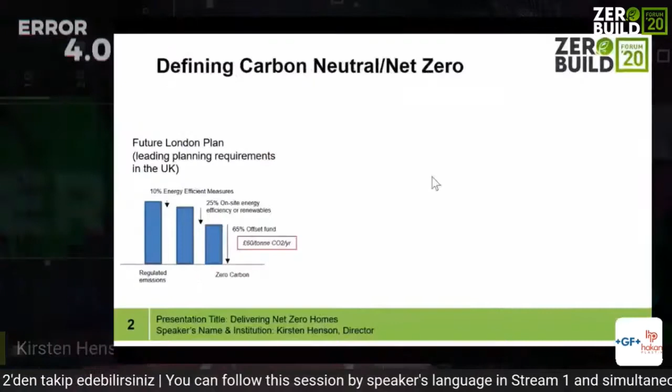I think the first thing to talk about really is how we define carbon neutral or net zero. In the UK, London is seen as the city that is pioneering the direction of net zero carbon. But in the future London plan that's coming out, we talk only about regulated emissions, and those are the emissions controlled through planning policy in the UK, something we call Part L. That only deals with space heating, water heating, lighting and cooling. You'll see that there's a problem with that in terms of moving towards true net zero.

The second problem with the way that we talk about or define carbon neutral in conventional planning policy in the UK is that, beyond only talking about regulated emissions, the planning policy requires us to deliver a 10% reduction through energy efficient measures, then a 25% additional reduction through on-site renewable energy generation, and we can simply pay £60 per tonne of CO2 per year for a 30-year period to offset the residual regulated emissions.

So there are real issues with this. If we have a look at the next graph here, you'll see the regulated emissions — this is what some people are calling carbon neutral, even with this offset: heating, lighting, cooling and hot water. Some people are starting to talk about net zero being full operational emissions, so this is in the UK what we call unregulated emissions, the red bar here.

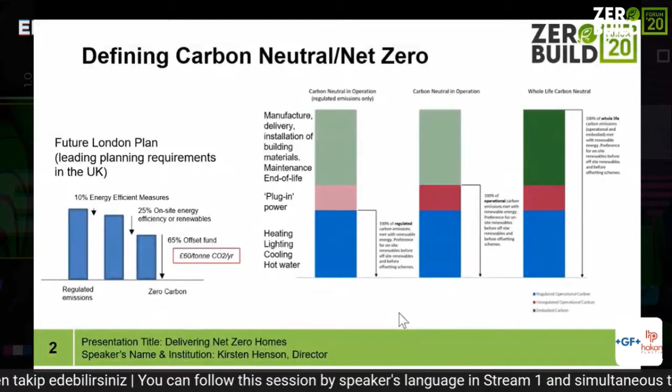Interestingly, he already had a design. The designers were at early stage 3—that's sort of a concept design in the design stages that we use in the UK. So we were already working with something. Our first port of call was to have this conversation with Ben, and explore what we need to do around defining carbon neutral.

Some people get distracted by renewable energy technology, but what we fundamentally must do is reduce. It's the first step—we've got to reduce our energy consumption in the first place. There's no way we can install sufficient renewable energy capacity if we don't significantly reduce our consumption first. In order to then look at generating sufficient renewable energy on site to meet the demands, we need to be looking at all-electric buildings.

We need to be moving away from gas. We generally use gas for heating hot water in the UK, and we need to move away from that. At the moment, we tend to rely on the electricity grid—we export our excess renewable energy to the grid, and we import, for example at night, if we have PV panels, we need to import energy from the grid.

This is only going to work for a certain amount of time before we really start having to look at renewable energy storage—whether that's hot water storage, battery storage, or localized storage. Otherwise, the energy grid is simply going to fall over with these peaks and troughs.

But at the moment, we look at zero carbon on a net annual basis. We generate sufficient energy within our building footprint to meet our building demands, but over an annual, not daily, life cycle.

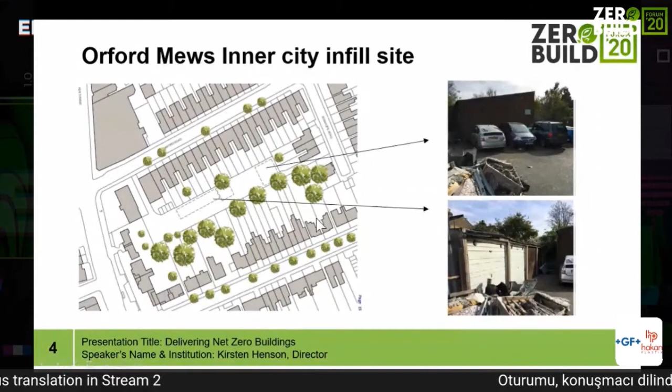What you'll see here is surrounding houses—these are the sort of Victorian terraces. People love them because they've got these big back gardens that you see here. But at the end, you tend to get these rather rundown garages that are underutilised. You can see this was the site we were looking at, an infill behind the properties, well spaced from them, with access just alongside as well.

So the initial design—the architects had already started work. We had the imagery you can see here. It's quite complex, single story, part two story. You can see there's a lot of movement in the facade in terms of setbacks and corners. We have some very complex junctions here, including a glazing-to-glazing junction.

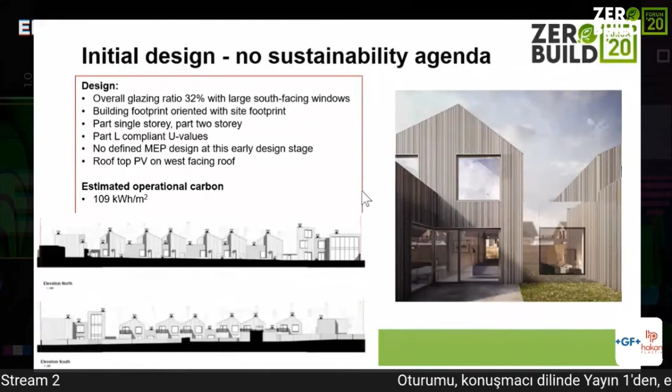We were looking at glazing ratios of 32% with large south-facing windows, and Part L compliant U values—that's where regulations will take us, the regulated emissions that tell us what U values building fabrics must achieve. At this early design stage, there was no mechanical and electrical yet, and there were rooftop PVs on the west-facing roof.

When we did the analysis, we found that the estimated operational carbon was about 109 kilowatt hours per metre squared.

Having a look at the embodied carbon, it was quite traditional - we traditionally build homes out of brick, but with a concrete strip foundation. The architects tend to like open plan living spaces, and that led us to a lightweight steel frame within the building, PUR insulation materials, and aluminium roofs. The homes had timber facades, but the workspace had an aluminium facade proposed. The estimated embodied carbon, when we calculated it, was almost 1,000 kilograms of CO2 per metre squared - so really quite significant.

Once we got involved with a great design team, the engineers and architects really embraced this idea of carbon neutral and engaged with us in looking at what they could do to reduce the operational carbon. We started discussions around building fabric, doing analysis of how you could improve it and what difference that would make, the impact of different mechanical services, the air tightness, build quality, and the design details of the building form factor itself.

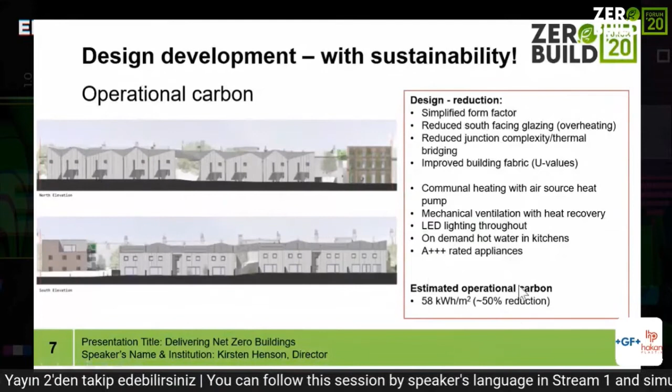So that has delivered almost a 50% reduction in the operational carbon, bringing us down to 58 kilowatt hours per metre squared. The other great thing, of course, is we looked at PV panels on the roof.

What you'll see here is a really nice design quirk, in that we've simplified the building form, but the architects have then twisted the roof to allow maximum south-facing roof - the optimum orientation and optimum angle for the PV panels to maximize their output, which also adds design interest.

And you'll see the building at the end - this is the office space, so you're seeing the PV panels there on the roof as well, with some small green roofs and terraces cropping in on the roof spaces. That has brought us right down to just 15 kilowatt hours per metre squared.

So we're not quite zero carbon yet - we've got some more considerations to look through. We're looking at smart technical solutions, on-site monitoring, having a look at how we can create an app that residents use to monitor and evaluate their own energy consumption, and owner engagement. It's not just a case of selling these buildings and walking away.

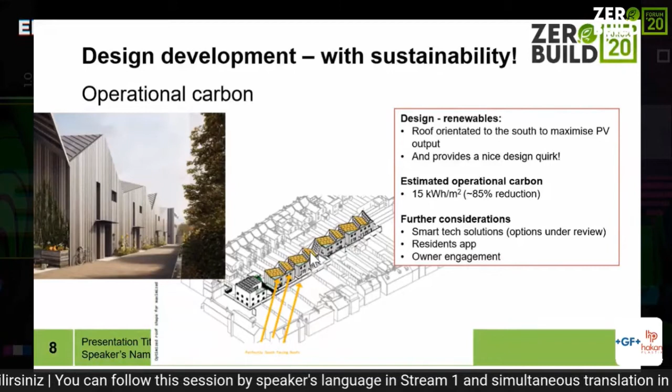We do need to engage the residents in how they're using their buildings, and see whether through that engagement with smart tech, we can get this down to a net zero carbon operational residence.

If we look at the embodied carbon, we did an analysis. For those not familiar, this refers to European standards: Module A, B and C. Module A is about the extraction and manufacture of the building product. Module B is any replacement - for example, a building may last 60 years, but you'll likely have to replace mechanical systems maybe in 20 years, and windows perhaps every 20 years. So that looks at replacements. Module C is what happens at end of life, so the disposal impact.

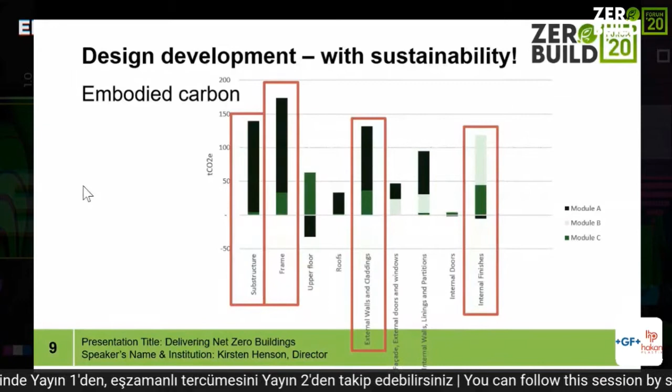So we started here - this is the analysis we did to engage with the engineers and architects to look at some design solutions. The engineers suggested that if we reduced the 8-metre internal span in the living areas to 4 metres, that would allow us to have a locally sourced softwood timber frame.

With the existing garages, the engineers realised we can reclaim some bricks. We can perhaps use that for commercial space cladding, but we can also use those reclaimed bricks in foundations - moving away from a lot of concrete in the foundations by actually using salvaged bricks from site.

You'll see we've started exploring innovative materials. This was actually done on site - some of my team with experts building true rammed earth walls. There is no cement in these walls. People often talk about rammed earth, but they put so much cement in them that they really can't be considered rammed earth. This is literally nothing but the earth we have on site.

You can see there's sufficient clay in there that we're producing a really quite beautiful architectural internal wall, which means no finishes are required. The finished building provides thermal mass within your residence as well.

We've moved away from those traditional building materials. The aluminium facade on the office building is replaced with brick, locally produced in the UK, with much lower embodied carbon. You can also see planting going on around outside. We've moved away from plastic PUR insulation to sheep's wool insulation, and instead of plasterboard we're looking at wood fibre boards and clay plasters - really natural finishes, natural materials.

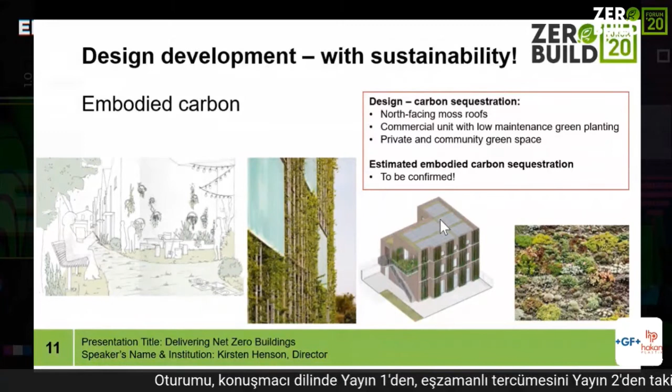And just a note on the broader idea of sustainability. It's not just an office space, we've decided. Actually, we need a community well-being space so kids can get together and have a birthday party. You can invite your neighbours round to do some yoga together, or have a dinner party. So providing that flexibility, providing that space.

And I think as we've been suffering with COVID and the lockdowns, we all know the COVID crisis has caused a mental health crisis. I think these protective spaces within our community are going to be really important as we face more and more of these challenges, whereby people can still protect themselves but don't have to completely lock themselves off from social contact, because that's really quite damaging.

We're going to have a reuse station. So the idea is not everybody needs to buy a ladder or a hammer or a drill if they want to put up a shelf. They can simply go to the community reuse station and borrow those materials.

So we're moving towards this idea of a sharing economy, a sharing room, composting facilities provided on site so that people can use that community area for growing vegetables, providing a bit of resilience, if you like, in terms of community food provision as well.

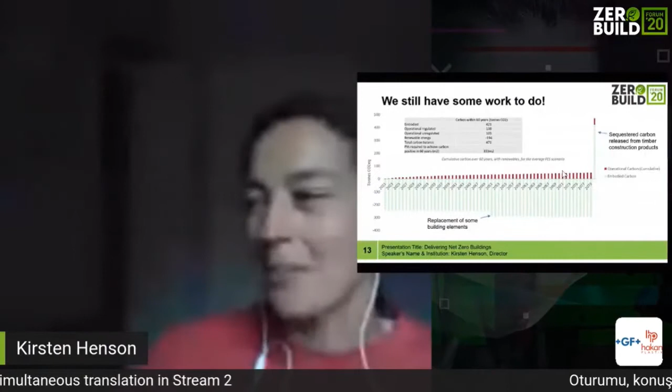So we do still have some work to do. This shows you the red bar is the operational carbon, the cumulative. You can see that very small increase as we go. The grid in the UK, as with many electricity grids across the globe, is decarbonising, so we have taken that into account. But even with all of these initiatives and ideas, we still have a little way to go to deliver true zero carbon.

What you can see here is the negative embodied carbon of construction, and that's because of all those natural materials we're using. The clay has very low embodied carbon, but the timber and straw sequester carbon during their growth period, so they become negative. There is something very strange with carbon footprinting.

The methodologies we use in the UK say that all of that carbon we've sequestered in those natural building materials has to be released into the atmosphere at the end of life. So even if we reuse those building materials rather than burn them, for example the timber, we still have to release that embodied carbon once we reuse it.

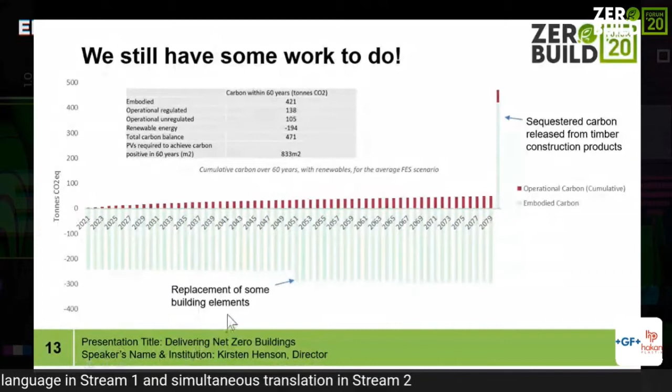My feeling is that we face a carbon crisis now. So let's take advantage of natural building materials that absorb carbon in their growth, rather than using concrete and steel that release carbon when manufactured, and we can continue as we move towards this low carbon economy. The fact that we may burn the timber for biomass afterwards, I think we're moving that down the line - it's not that we're shifting the problem, but we face a carbon crisis now. So let's move towards low embodied carbon materials.

So in terms of repeating success, I think there's a few key things we need. There's a strong client vision. You need to ensure there's a clear definition of net zero carbon that's understood by the whole design team before you start. There's a willingness within the design team to include sustainability as a key design driver. We often look at cost, program, and architectural wow as design drivers, but sustainability has to be a key design driver in order to progress towards zero carbon, and designers have to think within those sustainability parameters.

Collaborative design, where everybody is open to ideas. No idea is shut down before it's explored properly from a cost, program, architectural, engineering perspective. It's an iterative process - we can't get this right the first time. So there is time required for thought, time required for analysis, to go back and do the technical analysis and see how far we've got.

Exploring innovation with the supply chain is a really important part of delivering zero carbon buildings. And of course, trialing new products as well - we can't be afraid to try some of those new products.

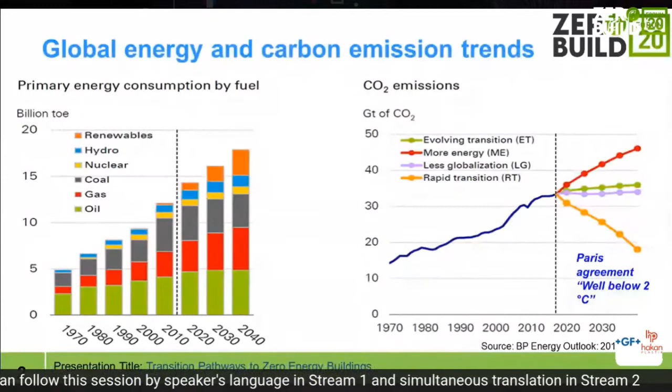Now, as we use more energy, we are also trying to achieve less carbon, and this doesn't go so well. If we want to achieve the target of the Paris Agreement, then we have to immediately start reducing our carbon dioxide emission. And by the middle of the century, we have to about halve that or reduce it by about 50%.

Now, for us to reduce energy use in our society, we have to understand where we use the energy and the dynamics in these sectors. And if we look at our sectors, we can see that the building sector is one of the sectors which uses the largest share of the energy, apart from the industrial sector.

Today, 1/3 of all our energy is used in the building sector. We can see that the annual growth of energy in our sectors has reduced slightly because we are pursuing more energy efficiency measures. But still, the energy used in the building sector is significant.

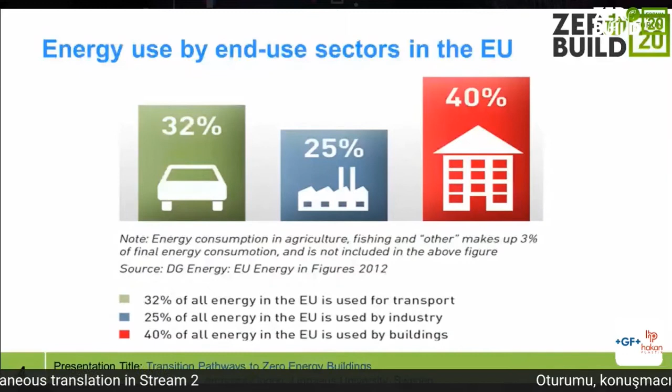This is a global picture. We can also see the same picture from the European perspective, where we see that the building sector accounts for most of the energy use. So we have a lot of potential in the building sector because this is a sector we use a lot of energy, both globally and in the European Union.

So this gives us motivation to pursue efforts to reduce energy use in the built environment, or our building sector. There are many measures we can implement in the building sector. Today, what the European Union is advocating for more and more is transition to nearly zero energy buildings - that is, buildings with low energy use and the use of on-site renewable technologies. This is how the European Union defines nearly zero energy buildings.

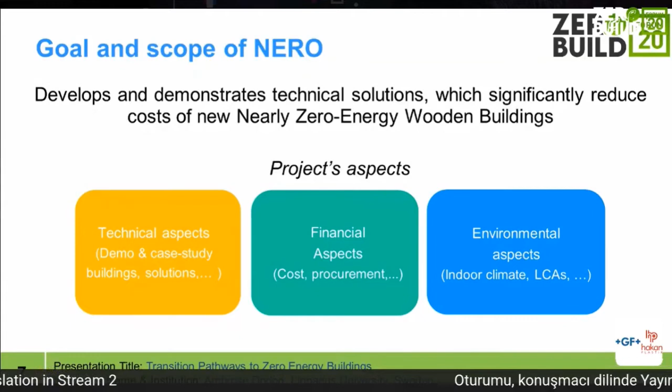The project looks at three main aspects. We have the technical aspect, where we look at reference buildings and case study solutions - for instance, what kind of insulation or measures can we implement to achieve nearly zero energy buildings. We also look at the financial aspect, that is the cost effectiveness of the measures, and also the procurement models to implement these measures. And lastly, we look at environmental aspects - life cycle impacts of these buildings in terms of embodied carbon and embodied primary energy use, and also indoor climate conditions.

So these are some of the buildings which were studied in the project in Växjö. As I said, we have project partners from 3 other Nordic countries, but in Växjö, Sweden, these are the buildings which were studied. As you can see, most of these buildings are wood frame buildings. Of course we have a concrete frame building here, but most of these buildings were built with wood frame, and just recently.

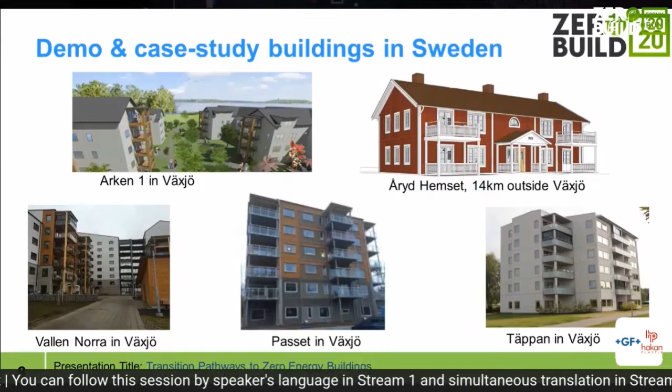So the buildings we studied in this project are quite energy efficient compared to what is required by the building code. What we have done is look at the calculated and measured energy performance of the buildings. For instance, we have the Arken building in Växjö, Passet, and Vallen. We can see that the energy use of the building - space heating, ventilation electricity to drive the fans and pumps, domestic water, and property electricity for facility management - is quite low compared to what is required by the building code today. Today the building code requires about 90 kilowatt hours per meter squared for a standard building in Växjö. But all the buildings studied had a lower delivered energy use compared to what the building code required.

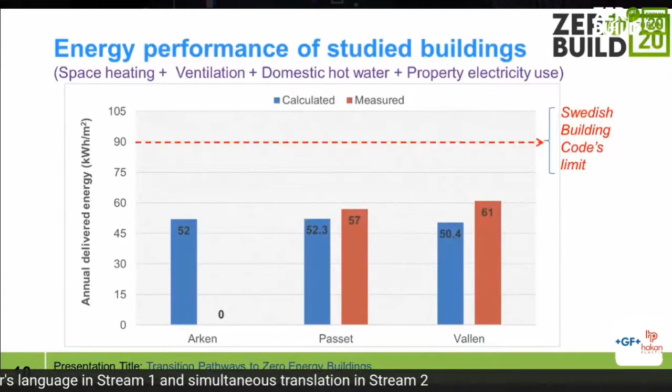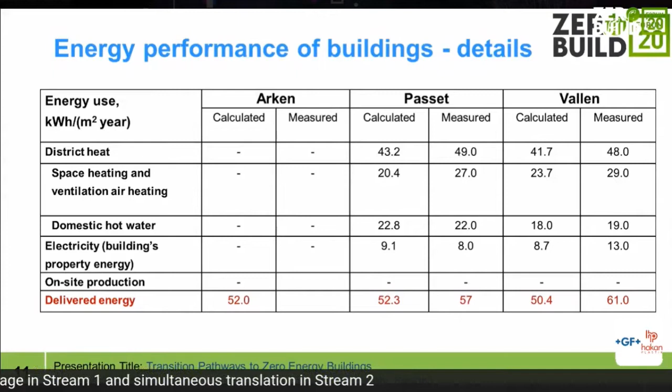These are the details of the energy performance. What I would like to say here is that if we look at this figure, which shows the total delivered energy use in detail, we can see that it is dominated by the energy for space heating. So space heating is a dominant energy demand for the buildings, and this is not surprising as we are dealing with the Northern European climate, where it is much colder compared to other parts of Europe, for instance.

We have also done life cycle analysis of the buildings to see how they perform from an embodied energy and embodied carbon perspective. We used the European standard EN 15978, and focused only on the product and construction stage of the building, modules A1 to A5. We have not looked at the use stage, end of life stage, or potential benefits, which if we did, would show wood has more advantage. But in this project we focused only on the product and construction stage.

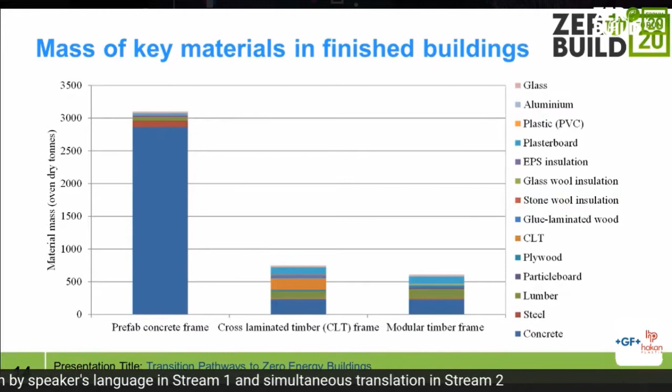Here we see the mass of materials in the different buildings. In the concrete frame building, the mass of material is dominated heavily by concrete. In the timber buildings, the cross-laminated timber building and the modular timber building, we also see a significant amount of concrete for the foundation and for stability reasons, but the use of plasterboard, CLT, and lumber is also quite significant.

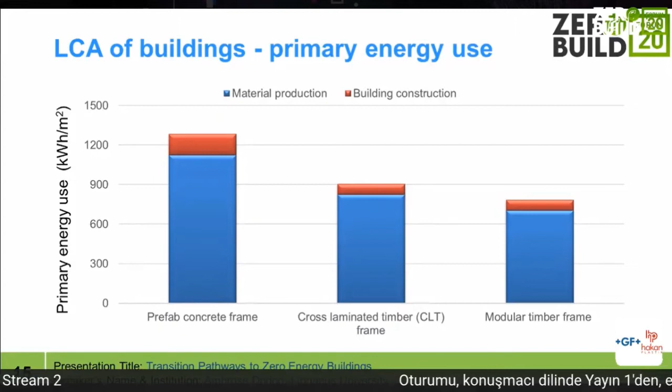Looking at embodied energy use, the energy for production for modules A1 to A5, including raw material extraction, transport, and assembly of the buildings together, we see that the concrete frame building uses much more embodied energy or primary energy compared to the timber buildings. It takes more energy to construct the concrete building because we need heavy equipment to move the prefab concrete elements compared to a timber building. Also, producing the material requires a lot of concrete and reinforcement in the concrete building, resulting in much more embodied energy use for production.

This is a similar figure but for the carbon footprint, that is embodied carbon. We can see that the carbon emission for the concrete frame building is about twice that of the wood frame building. So building with wood results in less carbon dioxide emission compared to concrete, as Kirsten has also emphasized in the presentation.

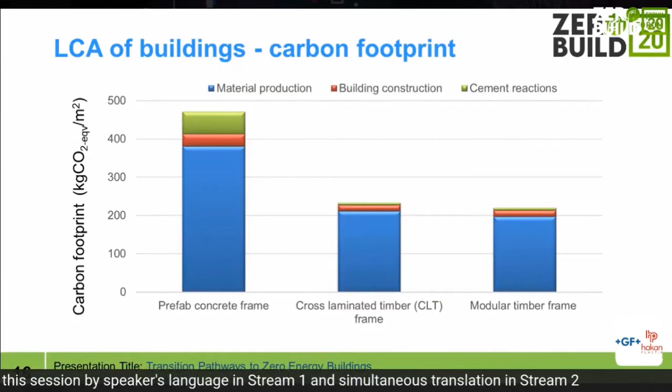Here we see the details of the different flows: material production carbon emission, building construction, and the cement reaction. The cement reaction is the carbon dioxide emission released during production of cement from the calcination process. One of the raw materials for cement production is limestone, the biggest raw material. You have to heat the limestone to break it down into clinker, which is calcium oxide, and carbon dioxide is released in this chemical reaction. This does not come from fossil fuels, and we can see it is also quite significant.

We have also done economic analysis to show the cost effectiveness of the solution, and we dealt with different issues. For instance, when doing this kind of cost analysis, where is our reference, or which building should we use as our reference? If you want to develop a zero energy or nearly zero energy building and see whether it is cost effective, you have to compare from somewhere. Should the reference be the minimum requirement of the building code, or existing buildings which are less efficient compared to today's building code? The next issue is the actual solutions.

What kind of solutions can we implement to achieve nearly zero energy buildings in terms of windows, insulation, and ventilation systems?

Another important question is the service life of the measures. How long are they going to last? This influences the cost, because if we have to replace the measures several times, the cost is going to increase. But if the measures last longer for the lifespan of the building, that makes them more cost effective.

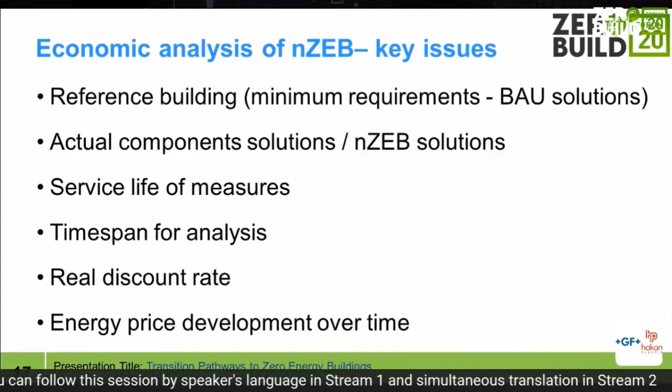These are some of the data and assumptions we have used for analysis. For instance, we have used a 50-year time span, and we have used the energy price in the Swedish city of Växjö, where the buildings are located. We have used a double-stage optimization method we have developed for this kind of analysis, which I won't go into due to time constraint, but the reference for this method is given in the slide.

We have also done cost optimal analysis. What is cost optimal? Obviously, what can give us a nearly zero energy building is different from what can be cost optimal. So we have done this analysis looking at different discount rates and different energy price increases.

For business as usual, we used a discount rate of 5%, typically used by businesses today. For the intermediate, or middle scenario, we assumed a real discount rate of 3%. Then we have the sustainability scenario, where the real discount rate is 1%, to encourage investment in energy efficiency measures or for companies to borrow money to implement these measures.

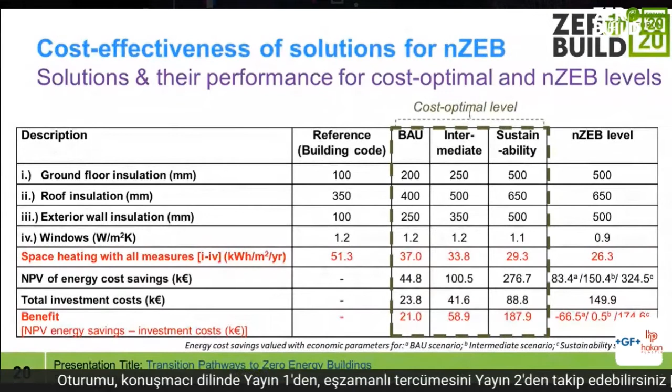The next thing is the cost effectiveness of the measures. We can reduce space heating a lot, but when we implement nearly zero energy building, we get some cost benefit depending on how we discount our investment. We can see that the benefit we get is very small compared to, for instance, when we have cost optimal solutions, such as when we have a low discount rate under the sustainability scenario.

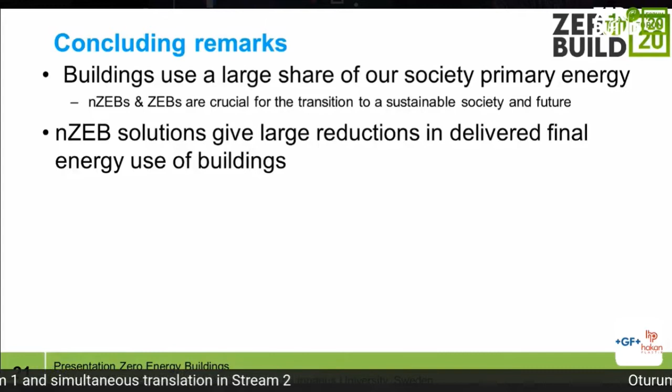In conclusion, the building sector uses a large share of our society's energy use today, and nearly zero energy buildings are crucial for transition to a sustainable energy future. Nearly zero energy building solutions give large reductions in delivered energy use from the buildings we studied in this project. We also found that cost optimal solutions give bigger financial benefit than nearly zero energy building solutions.

So even though we get large energy savings from nearly zero energy building solutions, we have to do something about the cost - we have to make the cost lower. For instance, the government should intervene in these things; we should not just leave the market to operate by itself. We also found that the real discount rate is very important to make nearly zero energy building cost effective. If we have a very low discount rate, it will encourage investment into energy efficiency measures.

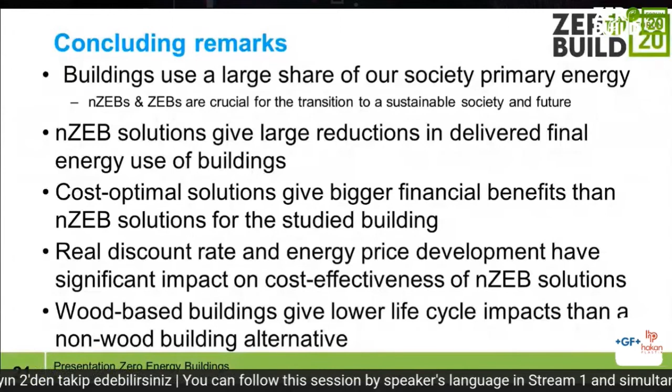And lastly, wood-based buildings give lower life cycle impact than concrete-based buildings. Thank you very much.

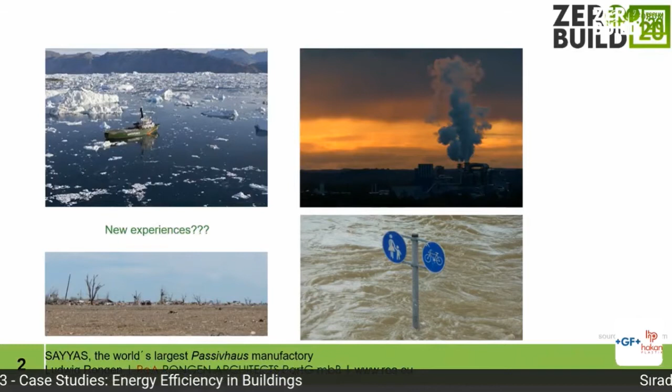These slides show us the experience we daily make. We can't reduce, we cannot stop the climate impact. I think we can only reduce or delay it.

Next, these slides are also our daily experience. We have to reduce energy consumption to minimize CO2 emissions into the atmosphere. The passive house is a worldwide acknowledged highest standard energy saving building. But we also have to think about renewable energies, we should supply our buildings 100% with renewables.

In 2010 already, all European countries decided to allow only nearly zero energy buildings from 2019 for all public buildings, from 2021 for all types of buildings. But we all know we did not reach that goal. For me it's also very important that we produce the renewables at the site where we need it.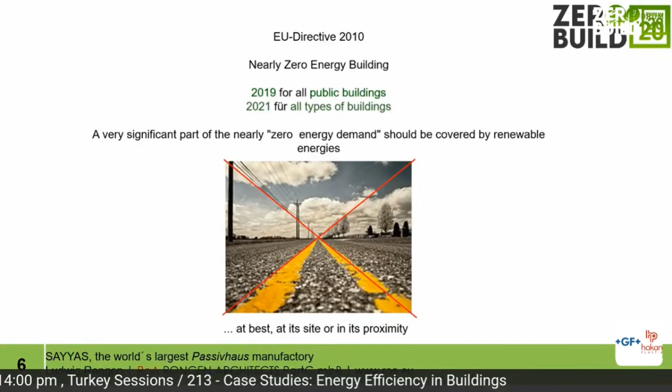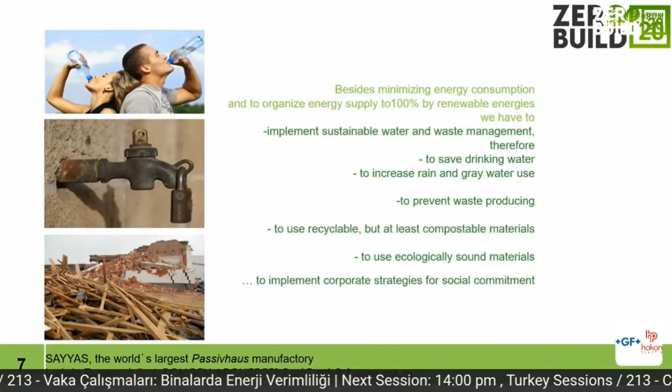There are many more requirements for sustainability in buildings. We have to think about sustainable water and waste management, avoid waste, save our water resources and drinking water. We have to use recyclable and ecologically sound materials, and we also have to implement corporate strategies for social commitment.

And for me, it's also important how can we reach the good U-values. It's very important to avoid hazardous waste. Otherwise, society would ask architects in the future, why did you destroy our environment? Why did you use toxic materials?

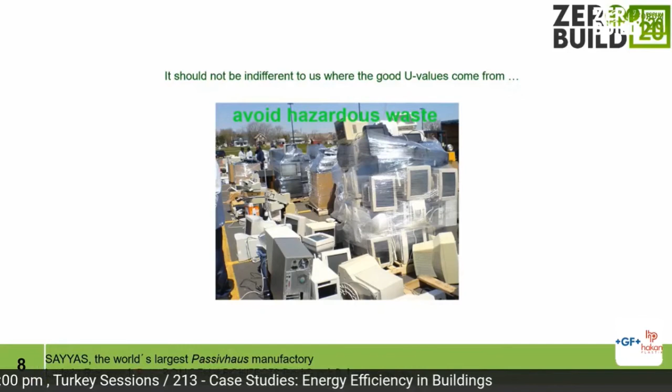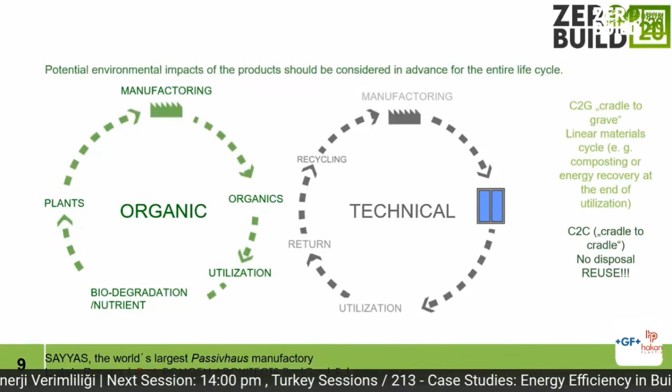By using recyclable materials, we can also give back the resources to the life cycles. Cradle to cradle, that's what we should do. And so we can avoid unnecessary waste, and we can also protect the resources.

High quality in architecture - I say architecture. Architecture is not only high quality in design. There are a lot of requirements, but it's also not only high energy efficiency.

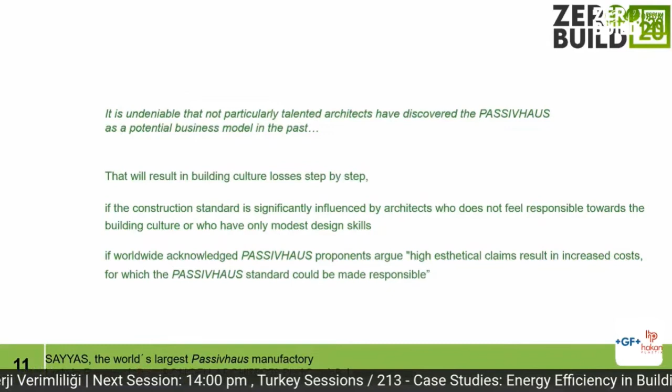In the past, not particularly talented architects discovered the passive house as a potential business model that will result in building culture losses step by step, if the construction standard is significantly influenced by architects who do not feel responsible towards building culture or have only modest design skills. And if worldwide acknowledged architects or passive house proponents argue high aesthetical claims result in increased costs for which a passive house standard could be made responsible, that is also a problem which could result in losses of building culture.

Design is not only a question of beauty, design is also a question of, in that case what you see here, increasing the capacity and concurrently reducing the energy consumption.

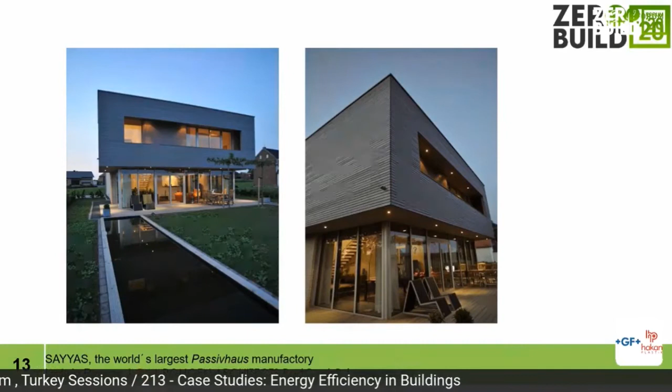In the case of that building, we waived movable sun protection because movable electric sun protection uses energy, and we want to reduce energy consumption. In that case, the overhanging second floor shadows the total glazed ground floor, so we have a huge solar gain in the wintertime and a shadowed living room in the summer.

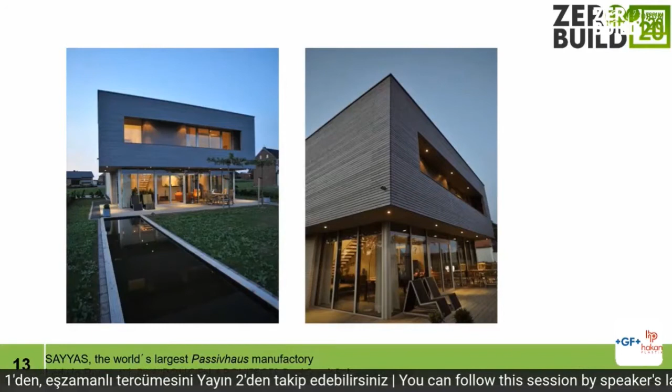And the water basin in the front is for pre-cooling the facade, the glazed facade, because in the summertime the wind flows over that water area, and by vaporization, we cool down the facade by around 4 to 5 Kelvin.

In the case of that psychiatric clinic in Cologne, we designed a clinker brick facade. For the client, it was very important to supply that building 100% with renewables. For that, we thought about deep drilling, but deep drilling was impermissible because of the water protected area in which our site was.

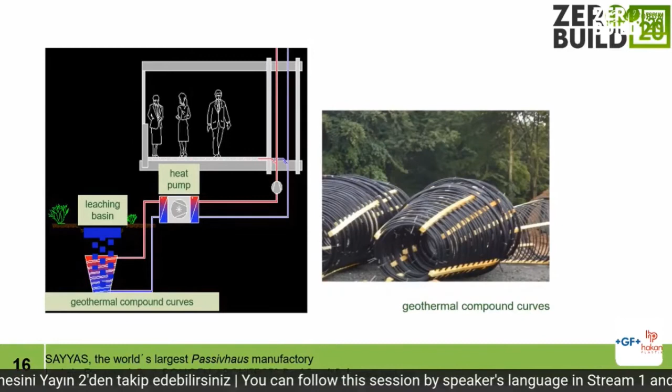So we decided to collect the rainwater in a leaching basin. The water sweeps away into the ground directly above the compound curves, and so it was possible to bring the building, that clinic, through the wintertime by renewable energy, by collecting the rainwater and sweeping it away into the ground.

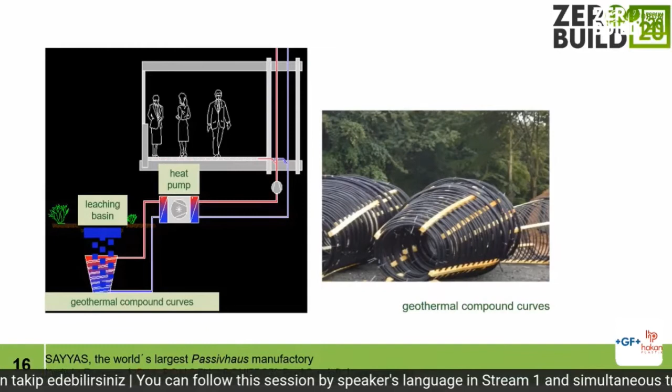It was possible to recharge the temperature, the warmness in the ground, better and more, and so we could gain enough energy from the ground to bring that building over the wintertime only by renewable energies. That's a finished building.

In the case of the plus energy building, we used an ice storage. By using an underground ice storage, we store the warmness, the heat from the summer, in a concrete storage under the ground without thermal insulation. It was not necessary to use thermal insulation.

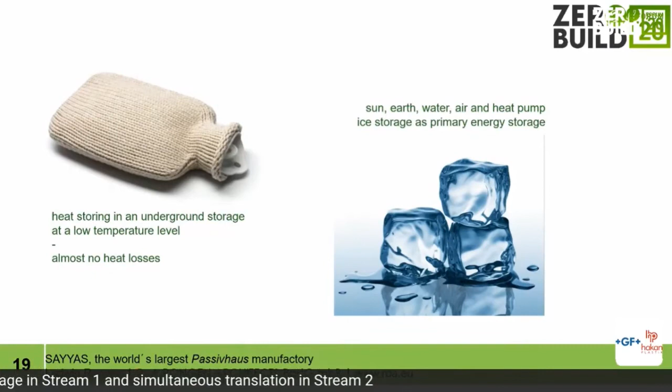In the wintertime, we produced ice by extracting the warmness out of the ice storage. We produce ice, and with it we can cool that building, the rooms, during the summertime. So we move the energy from time to time. In the winter, we use the warmness; in the summer, we use the ice.

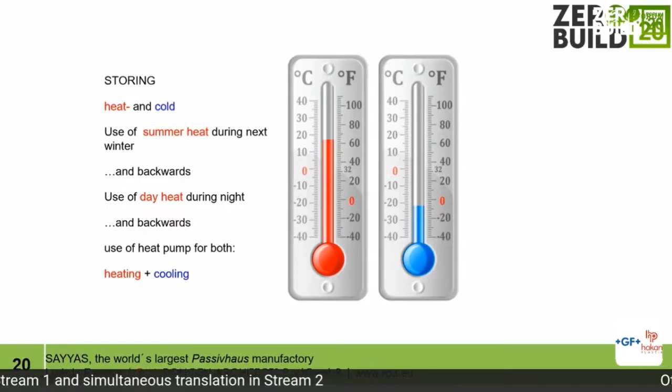It is here the same. Using a heat pump, we use the heat pump for heating and cooling. In the summer, the coolness comes from the ice. In the wintertime, the warmness comes from the water.

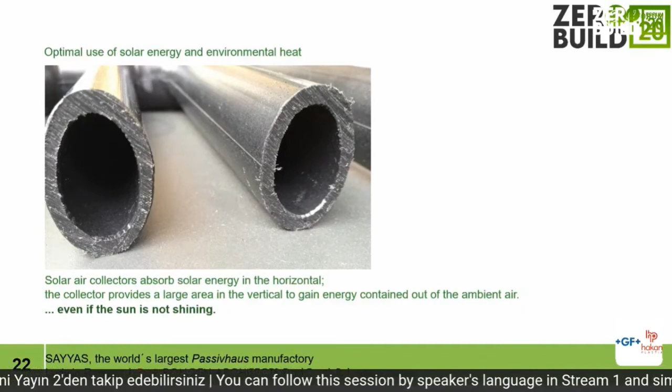And we used solar air collectors as horizontal absorbing solar energy collectors. These collectors provide a large area in the vertical to gain energy contained out of the ambient air, even if the sun is not shining.

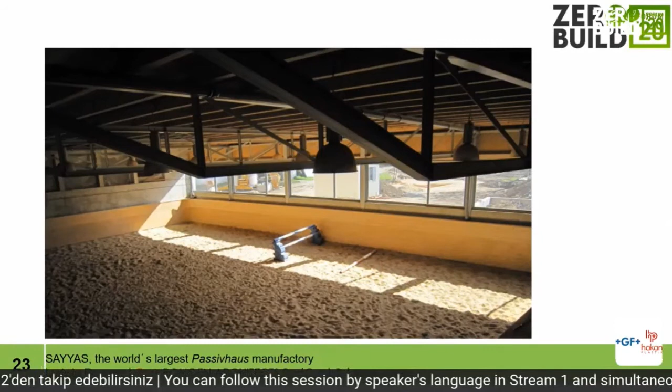We also built in combination with the flats an indoor riding hall, so we could also use the warmness of the houses for heat recovery.

Daylight is also important in the case of energy saving. Our intention was to reduce the electric power for lighting, so we designed a subterranean garage which is supplied with daylight.

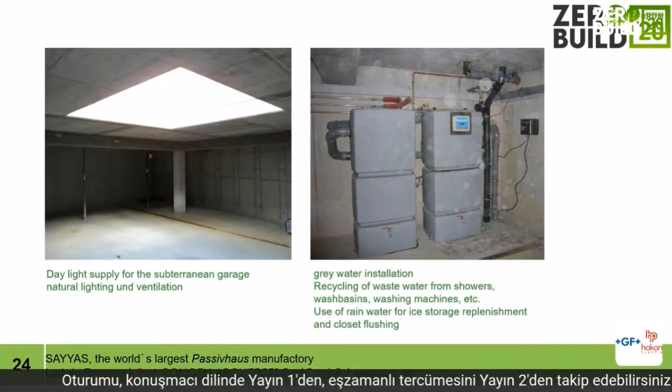In addition to these sustainable effects, we also implemented a grey water recycling system. The wastewater from the showers, the washing basins, the washing machines, and so on is recycled, and the rainwater we use for the ice storage and also for toilet flushing.

And each apartment, each flat, has its own recharger for electric cars.

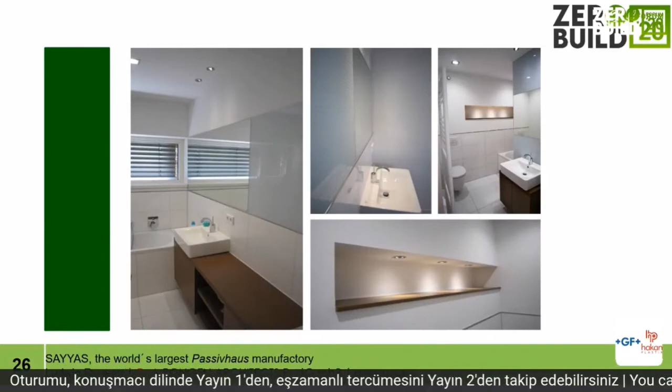You can see that this is not a normal standard building, it's a building of a very high standard. But for the renters who have free use of the indoor riding arena and also free charging of electric vehicles, there is no longer any utility statements. The gross rent, including all incidental costs, is 10 euros per square meter.

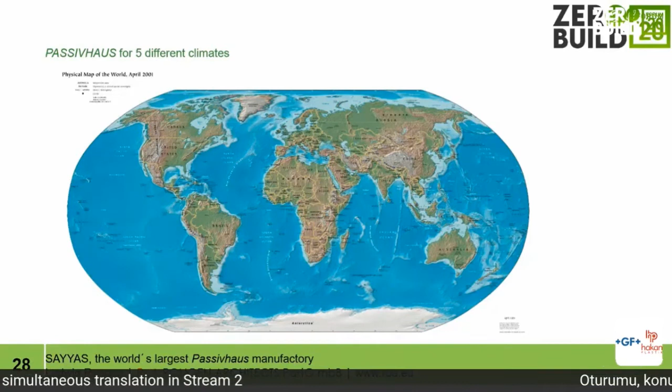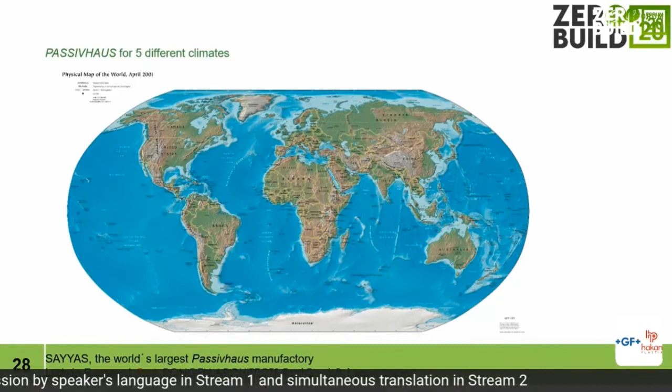Another project, together with Passivhaus Institute Wolfgang Feist in Darmstadt: we made a research project to develop Passivhaus for 5 different climates. There were Dubai, very hot and humid, Las Vegas, a desert climate, Yekaterinburg in north of Russia, a very cool climate, Shanghai, and Tokyo. The most complicated was the building for Dubai.

From the beginning of the design we have to think energy efficient. Because of that, only white color for the facade was the solution, because white color does not absorb the heat of the sun gain.

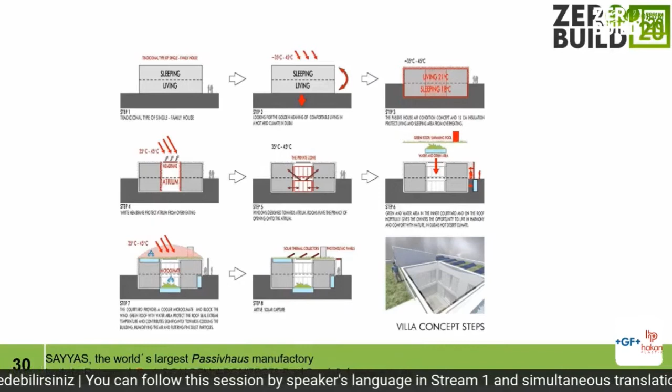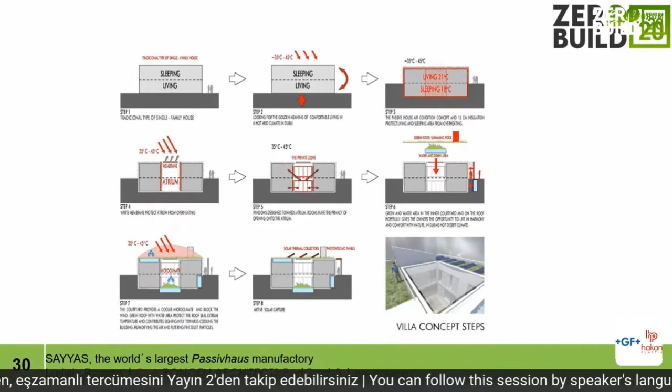And we also decided for an inner courtyard to create a microclimate. In the inner courtyard we implemented water areas and plants for the microclimate to reduce the temperature. And we brought the first floor into the subterranean, the underground, to reduce sun gain from the outside, and there we placed the sleeping rooms.

That's self-explained, it's the inner courtyard with water area and so on.

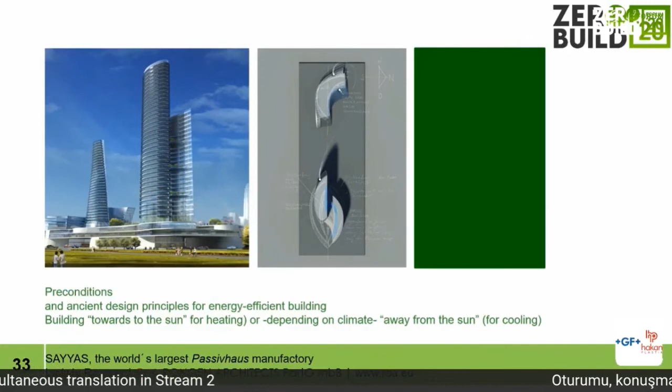Nantong Towers: we had to design 3 high-rise buildings, a hotel, an office building, and a residential building. The curved form of the buildings brought a longer time for sun gaining at the south, so we placed the living building at the south. The north, we placed the office building to reduce the cool load in summer, and the office building is shadowed by the residential building. Only by that design we could reduce the energy consumption by around 35%.

Dear Ludwig, sorry for interrupting.

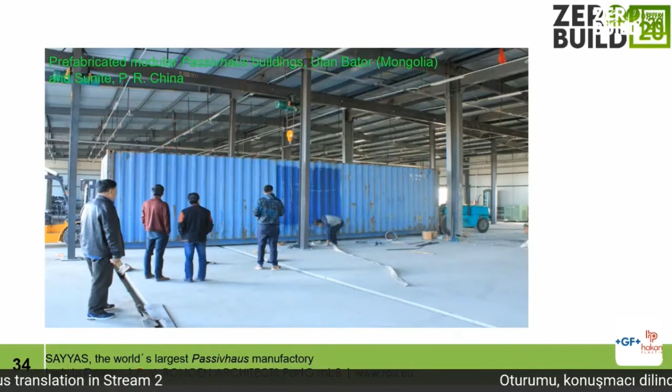Here we can see a modular building. We used containers for energy autark buildings in Mongolia.

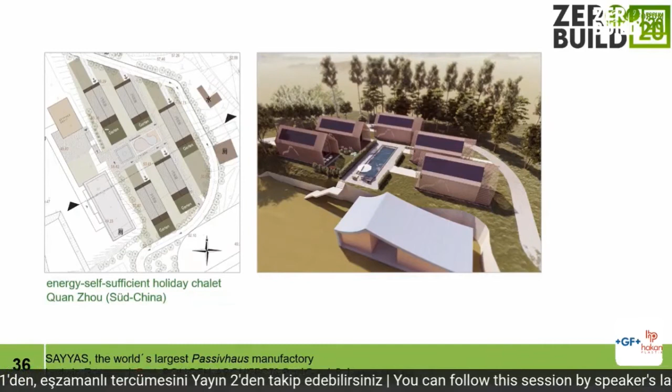We had to shadow the building. That building has 2 skins. The main skin is shadowed by wood glass outside. We also shadowed the south window.

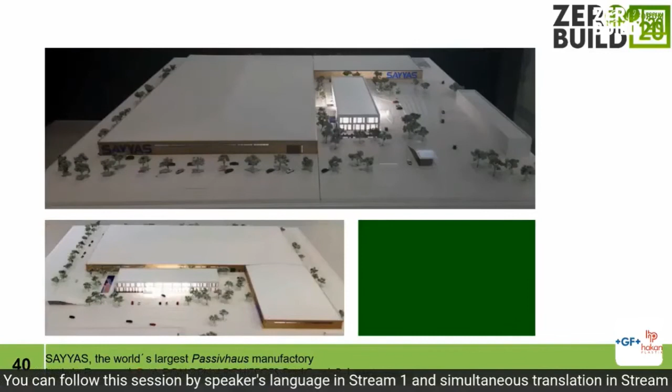That is the site of the largest passivhaus manufacturer in Harbin. That was a model of the building: here the manufactory, the magazine, the office building, in total around 35,000 square meters.

Here also the magazine, the manufactory, the office building.

Also in that case it is valid: long since the passivhaus is the highest standard in energy saving building, but it also has to reach other goals.

For that building, the client decided for a metal facade, which is totally recyclable. We made a lot of workshops for the designers and also for the crafts to avoid construction mistakes.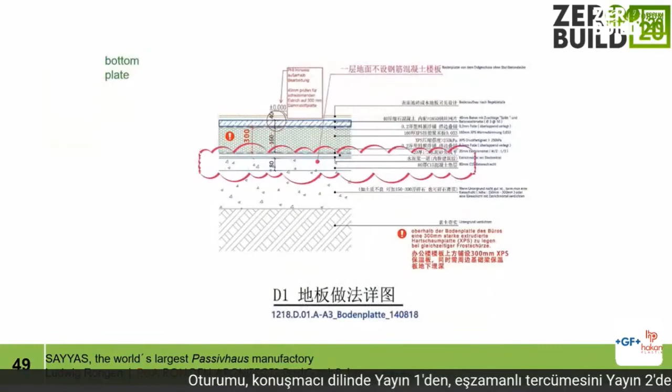And the Chinese designers, they used our details and had to implement our detailed design, and we corrected their mistakes and sent the corrected drawings back.

These are some examples of our drawings which were corrected by us.

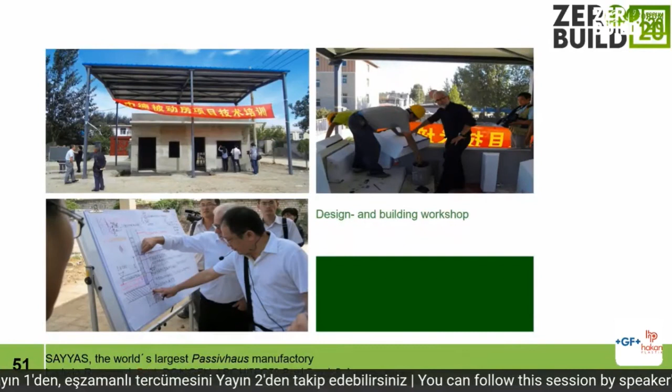Also a design workshop for the crafts, to train them to build correctly and to avoid construction mistakes.

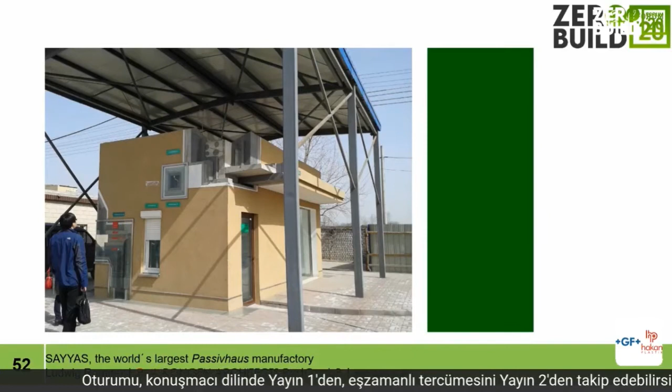That was an example building. How do they have to install windows? How could they avoid leakages in the airtight surface, and so on.

The site was always clean and tidy. They worked very carefully. It's very important to sensitize and motivate the crafts to do a very quality work which is carefully, neat, and tidy. The installation of the foundation of the building.

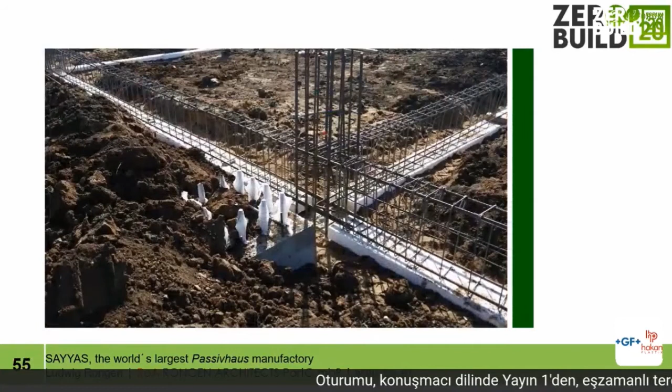Here's also a proof of the careful construction.

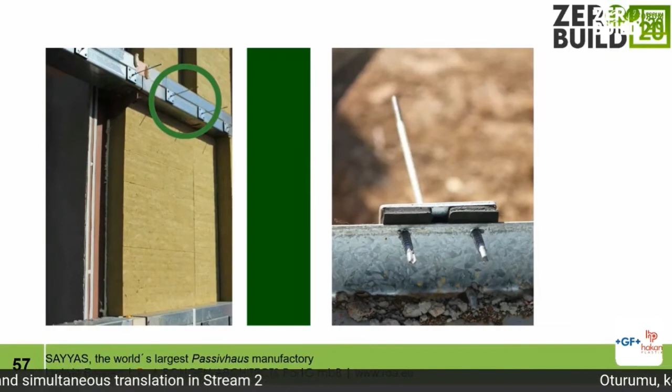We developed by ourselves thermal bridge-free anchors for the facade.

Here you can also see the carefully constructed implementation. The site was always clean and tidy. Very seldom I saw such clean site places and construction areas.

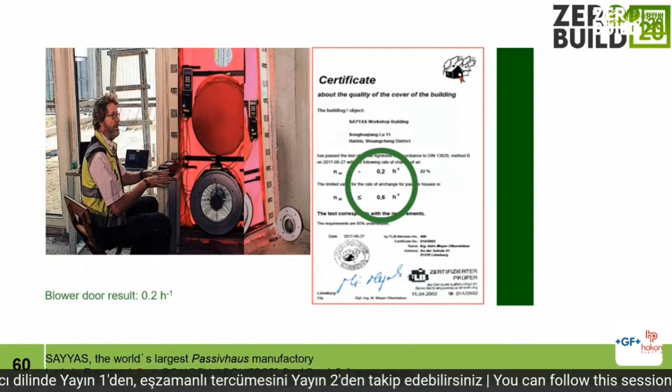The result of the blower door test was very good, 0.2 instead of 0.6. It was the first test, and it worked. They passed the blower door test on the first try.

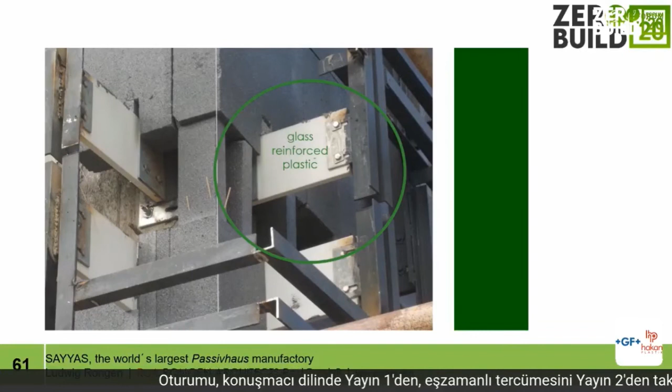We also developed glass reinforced plastic materials, thermal bridge-free construction components for the metal facade.

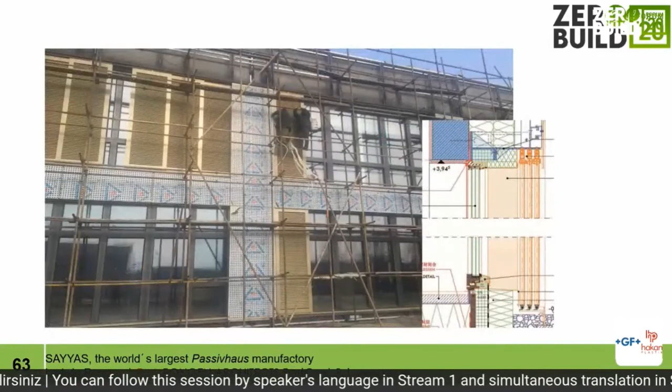The building under construction, the shadowing elements under construction.

Here you can see the manufacturer with the magazine, the office building, and also the gatehouse was realized as a passive house in Harbin, in the north of China, with average temperatures in the wintertime of -25 degrees.

When we visited the building after the construction was finished, in the first winter, the doors were always open, and the temperatures inside did not decrease below +18 degrees even with outside temperatures of -25 degrees.

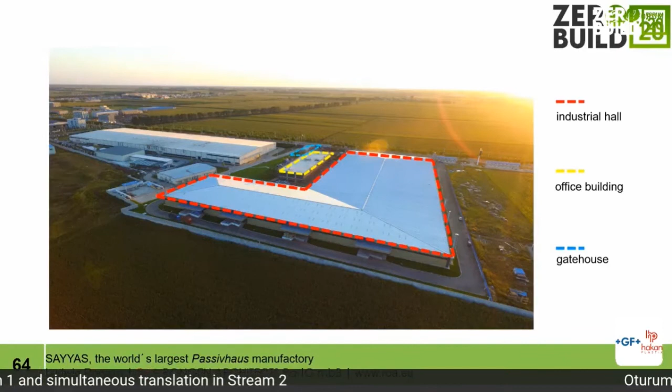That's a picture of the factory. The office building here was under construction, and the gatehouse.

I think it's also a building of high quality in aesthetics. And it's also handleable - you can clean the facade very easily.

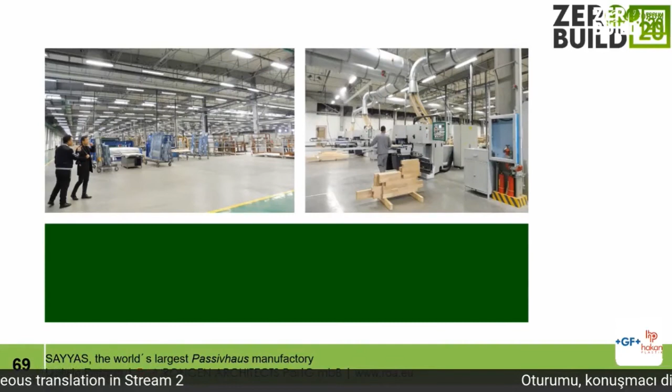During the process, in that manufactory, they produce passive house windows. It is always clean, comparable to a hospital.

The client said to me, I learned from you because the construction was always very carefully neat and tidy. And that's what I learned - now I will produce in the same way.

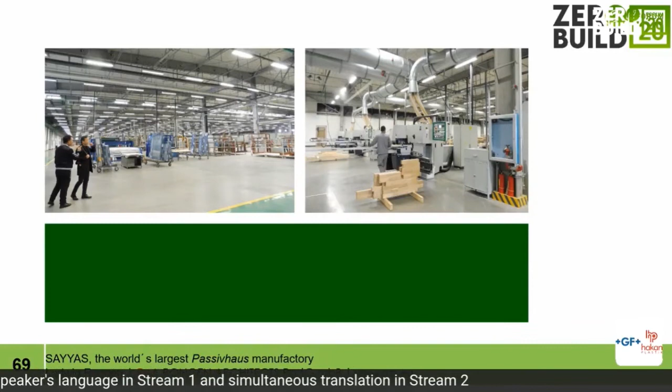Excuse me, Ludwig, we have completed our timing, but maybe 1 or 2 minutes extension. Okay, I'll speed up. That was the Solar Decathlon Europe competition with our students.

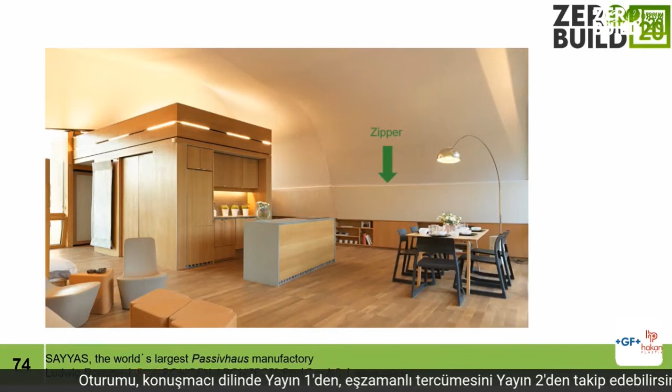It was a German-Chinese government project.

visited that project, and he was very proud about the result.

Thanks so much, sorry for taking the time.

Ludwig, thank you very much for your presentation. The title of your presentation was the biggest passive house project, so I had thought on it, and I had found an ironic feeling in the case of referring to its scale and being passive and being environmentally friendly. But then in your presentation, we understood that it was a manufacturing building, so it's not a house - maybe it's a kind of problem in translation from German to English, I guess.